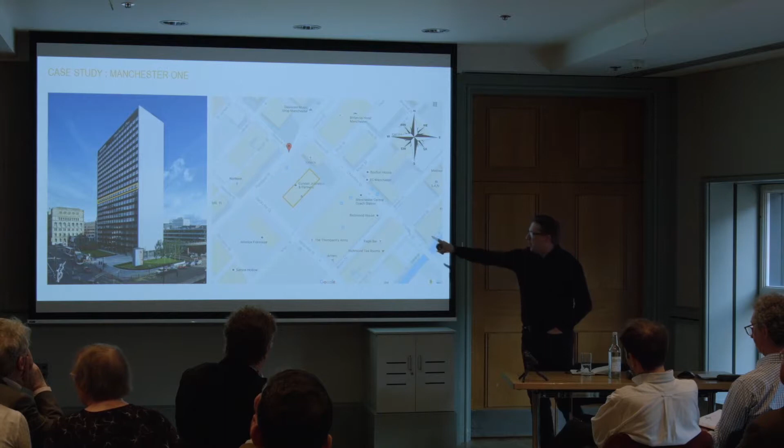Typical Manchester day on the left there. You know, I know you're all jealous, we don't like to advertise this too much. We've got no other buildings around us of that scale. Just on this side of the road here is effectively Chinatown, 3-4-storey high red brick buildings, no more than that. There is talk of the car park on the far side being turned into an office, but that might take a few years yet. Nonetheless, we have unrestricted views of the landscape around, and we have unrestricted daylight coming into this building. The building's about 15 metres deep from window to window, so we are blessed with daylight.

So you would think to yourself, if something's going to work, if you're going to get the daylight into work in a space, if you're going to be able to do equivalent melanopic lux via daylighting, this is going to be the building where you can make it happen. And that's one of the things that interested us. The building's roughly orientated northeast, southwest, so the windows are therefore southeast, northwest. We've taken an opportunity to look at both of those orientations. We only used to have half of this building, and then the tenants on the other side moved out just as we filled our half.

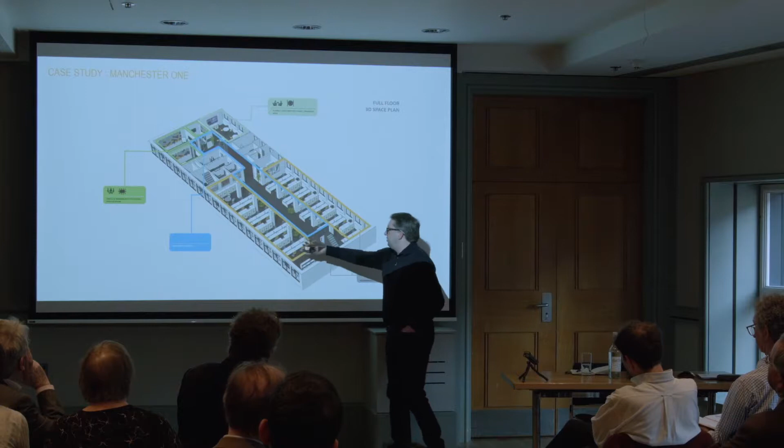So we moved our meeting rooms over effectively to the other side of the lift court, to the top left side, and that enabled us to relay out all of the desks. It's very straightforward: we put the desks as close as possible to the windows, and we put a nice wide corridor with breakout spaces down the middle. Where we don't have daylight, we've just got breakout spaces and a corridor, and display spaces. Where we do have the daylight, where we've got the windows, that's where we've got the people. It's no more complex than that, really.

So the lighting team all sit here. I bagged myself this position, which is fabulous. I might not have it for long when people find out the results of where they're sat. But it is a great office.

It's interesting what Cosmin was saying before. We can do all this number crunching, we can do all this analysis, but it just feels a great office. When you sit in there, it just feels a great office, regardless of how much light is actually arriving at your eye, regardless of how much daylight is actually arriving at your desk. Actually you're just looking at daylight - whichever way you turn, your peripheral vision is looking at daylight. So how do you put that into the standard? How do you actually get that into the standard?

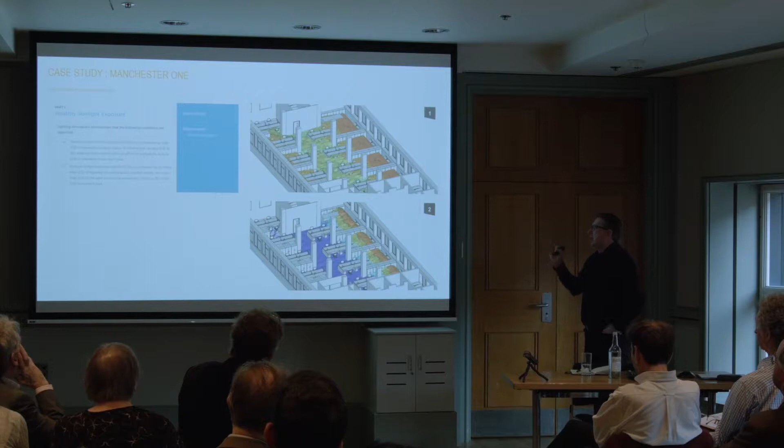So we did look at the daylight side of things, the spatial daylight autonomy, etc. Because of the way we'd laid the desks - and this is actually quite an old model now, because these desks didn't come this far in, we actually shortened each desk, and the desks finish almost in line with the columns - in terms of where the desks were laid out, we do achieve the credit for the daylighting side of WELL.

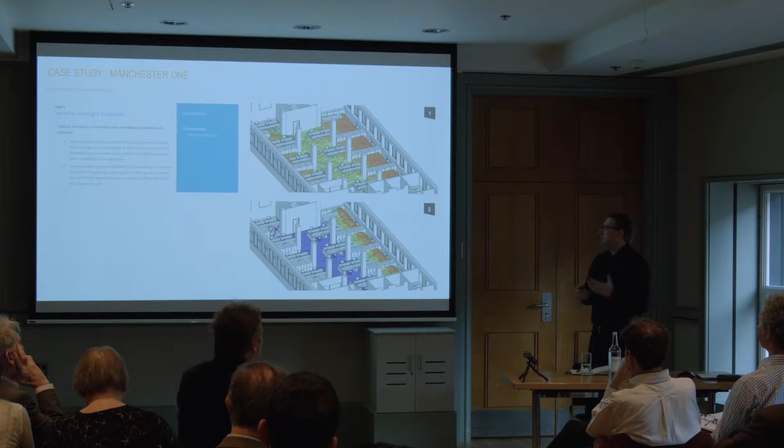But that's just horizontal lighting, looking at how much light you're getting onto your desk. Also, the second half of that, in terms of not exceeding 1,000 lux - being very practical, if you've got a blind, as far as I'm concerned you've passed that standard, because you can control whether you've got 1,000 lux or not. I don't think you need to analyse that personally. If you've got a blind and you want to limit your light to 1,000 lux or less, you can do so. So I think there are certain standards that may be a bit too numerically focused that aren't actually needed.

So moving on to the bulk of this now, looking at feature 54 and the equivalent melanopic lux and how we're going to deliver that. The big thing for us was putting the light where it's needed. We've said this for years, lots of other people have said this for years. We've said in other presentations where we've just talked about the electric lighting solution for this office - it's put the light where it's needed.

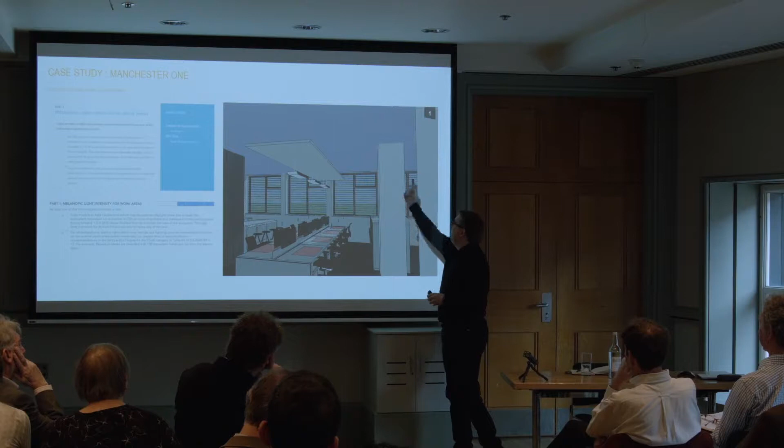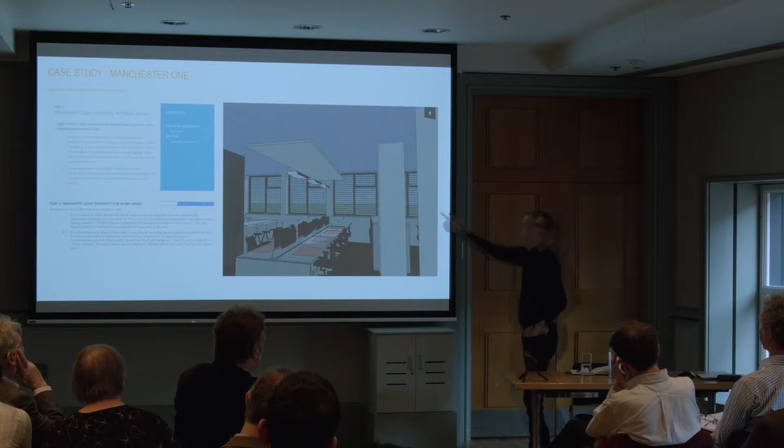So on the back of these columns here, we've actually got uplighters to light the large patch of open ceiling here. The reason for that is that the people sat here aren't looking at the uplighting here - they're actually looking at the uplighting on the ceiling in front of them. So we sat down and thought, where do people actually see? They see the end wall and they see the ceiling there, so that's where we're going to put the light. There's no actual uplighting from these fittings here because it's not often you sit and just look straight up above your desk.

We don't have slat blinds in there at the moment. That's something we're having installed so we can look at the difference between what we have now, which are roller blinds, and having slat blinds in there. And that's a very important part of what we're doing.

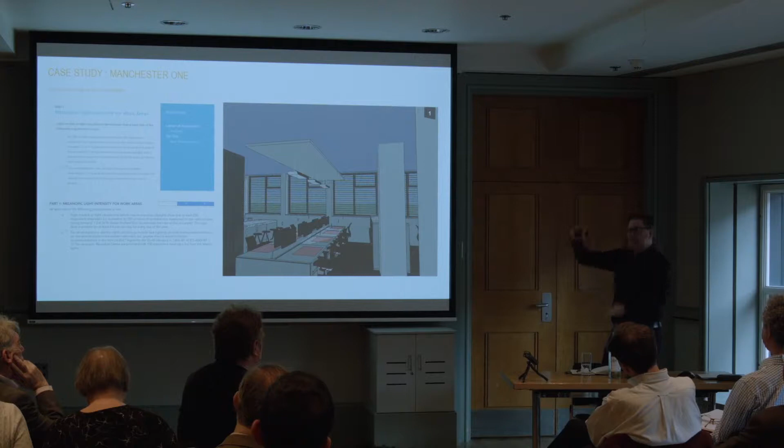The roller blinds we have in there were a requirement by the landlord. Bruntwood insisted that we had to have roller blinds because every floor had roller blinds and everyone had the same ones. So from their office two blocks away, when they sit on the 22nd floor of their building and look across at this building, we've all got the same looking blinds. They've obviously forgotten that we all like to put them at different heights to annoy them - the building doesn't look the same, the floors don't look the same. Some floors the blinds aren't down, some floors the blinds are down. But anyway, nonetheless, at the time we had to have roller blinds.

Putting the light where it's needed is something we've talked about for a long time, but it's also something we learnt from the London office. The London office lighting scheme was a Cat A fit out. The lights were only a year old, and it's not the design we would have done. It's just a checkerboard of lights, 300 by 1200 flat panel type light fittings. You've seen loads of them around London. We just don't like office spaces like that, and we certainly don't like fit outs like that. It's just not a good solution. Yes, it gets you 400 lux everywhere in an empty office on the working plane, but that's it.

Once you start moving furniture in, once you put screens in there and put people in there, you don't have that 400 lux everywhere, and nor do you need it really. So we had what we had, and we toyed with the idea of taking them out, but within the lease you're going to have to put them back in 10 years' time when you leave the building, and where do you store them for the next 9.5 years, and the cost of that. So they stayed in. It's not ideal.

But it did give us an opportunity to look at what happens vertically at each person's desk with this lighting scheme. This scheme apparently gets us 400 lux everywhere, because that's what we've been told it achieves. But when you start measuring vertically at different people's desks, only a couple of meters apart from each other, we're starting to see differences of 127 to 651 lux. It's huge. Now that is actually the worst place in the office. There's nowhere else that has that variation of vertical illuminance.

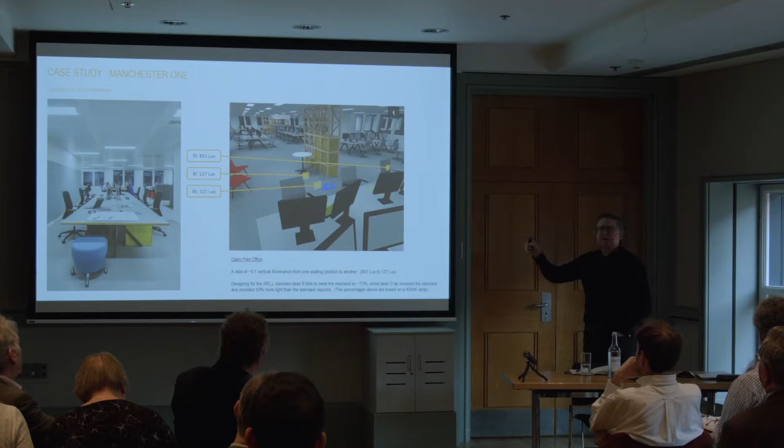So it was a good experiment to have had that, and we are in the process now of changing the lighting for the marketing team who sit here, because it is the worst place. They're the furthest from any daylighting, and the lighting just isn't working for them, so we're in the process of changing that now.

Hence we went down the route of putting the lighting over the actual desk, so you put the light where it's needed. We've got the lights over the centre of the desks, a little bit of corridor lighting, some lights that wash onto the back walls, and uplight on the other side of this column for uplighting the soffit.

And the results we get from that, if you look here, we've got desks 1 to 4 down one side, I sit at desk number 1, and desks 5 to 8 on this side. We've set the horizontal illuminance lighting levels to be about 350 on the desks, and that's roughly what we're getting on each of those. Vertically, we're then getting between 230s, 240s, 250s. Now that's the lux level we're getting, not equivalent melanopic lux level, so that's just the lux level from there.

So you could say to yourself, well, if we want to hit this figure within the Well standard, this 250 equivalent melanopic lux, if we just choose a particular light source, a light fitting that's 6,500 Kelvin, we can convert these vertical figures directly to equivalent melanopic lux, and we've ticked that box. Happy days, that's what we've done. Actually, we didn't want to go down that route.

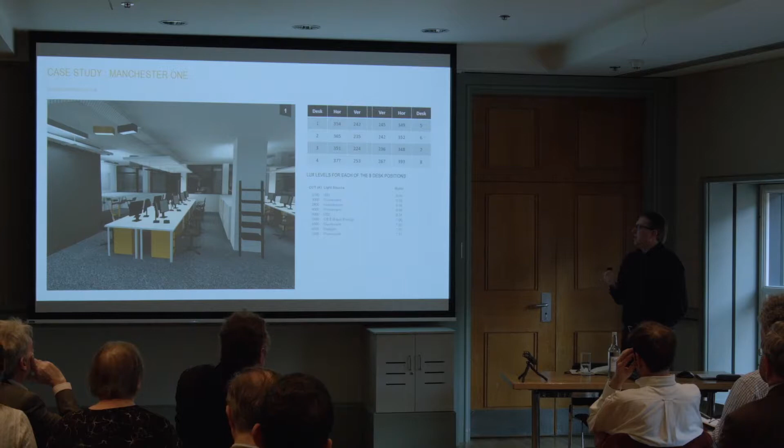Our strategy when we started designing the building and looking at the lighting was that it should always be daylight that lights a space, supplemented by electric lighting. The electric lighting shouldn't be the prime source within a space. We're looking forward to designing a building where the lights are off 90% of the time, though I'm not sure anyone can afford to design that kind of building and buy the land.

If you go to the National Gallery, some rooms have no lights on at all. It's great just walking through. And the quality of light, even though it's at a lower level, is fabulous - that's something else we've looked at with this.

So we said to ourselves, we want daylight to be the primary source of light. Even if that daylight isn't achieving the lux level the guides tell us we should achieve, is a lower level of daylight better than suddenly turning the electric lighting on? From the analysis of how much daylight we've got coming into these spaces and onto all the desk positions, we decided the electric lighting would only be 3,000 Kelvin.

So we've actually only got 3,000 Kelvin electric lighting over the desks, which is quite unusual - you do have to see it to appreciate it. What that means, using these figures as an example, is that in terms of chasing the equivalent melanopic lux target for the Well standard, we're actually only delivering theoretically 120 to 140 equivalent melanopic lux, because we've gone down the route of using 3,000 Kelvin lights over the desk. So we're not achieving the equivalent melanopic lux with the electric lighting.

But what we felt we were achieving was warm colour temperature light briefly in the morning, then daylight taking over through the bulk of the day, and warm colour temperature lighting again in the evening. That was the theory, and that's the route we've gone down.

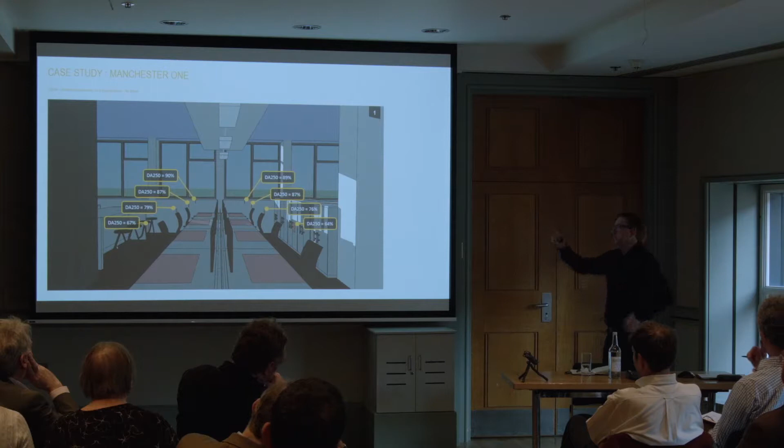And these are the results that came out. So I'm alright - I've got 90% of my time if I'm there, great lighting at my desk, assuming we haven't pulled the blind down. This is without any blinds, so it's the maximum amount of light we can get into the space. But it surprised us, because we were still getting 64% at the desks furthest from the window, which I thought was pretty good - that's two-thirds of the light they need coming from daylighting for those hours 9 till 5.

How many metres from the window is that? The desks are - I can't remember if we went with 1,500 or 1,600mm wide desks in Manchester. I think there were 1,500 in London and 1,600mm wide desks here, so you're looking at about 6.4 metres to the edge of the desk.

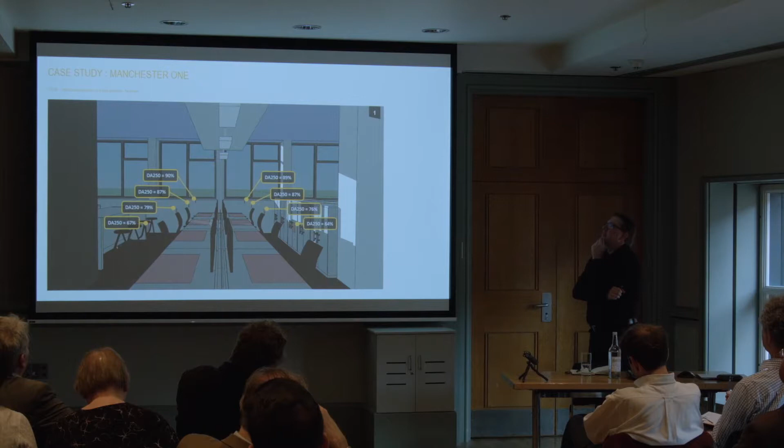This is also with the false ceiling taken out - we screwed all the services to the ceiling, and the windows go up to the soffit as well. Previously we used to have that nasty bulkhead detail and you lost the daylight at the top of the window, whereas now we've gained the daylight coming from the top of the window. The height of the space is about 2,950mm.

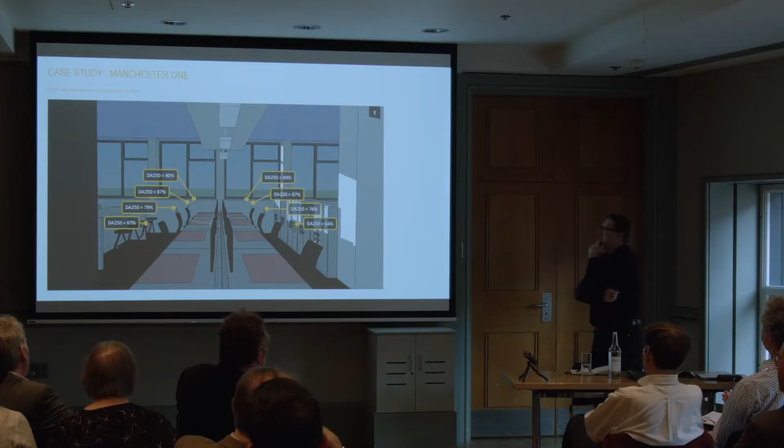So it's a high space with no obstructions - well, until the staff moved in, and then you start getting books and light fittings and all sorts of things all over the desk. So this is where we got to, and we thought, well, this is actually, as we expected it to be, a very good space.

Yes, we've got to deal with some glare control occasionally. But with it being our own office, and particularly with our team here, we are forever turning the blinds up and down because we know the value of it. As you go further down the office to the other disciplines, civil, structural, etc., the blinds tend to come down and stay down. We occasionally go over and say, look, lift your blind, this is killing you. And they do lift the blinds, but we do change the blinds a lot.

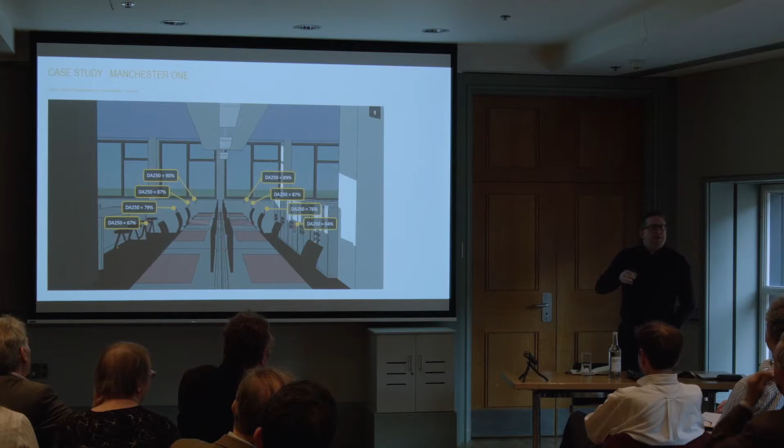So we're not far off achieving these figures. We're only expecting to top these figures up with the electric lighting. But of course, this is lux levels from climate-based daylight modelling. This is not equivalent melanopic lux.

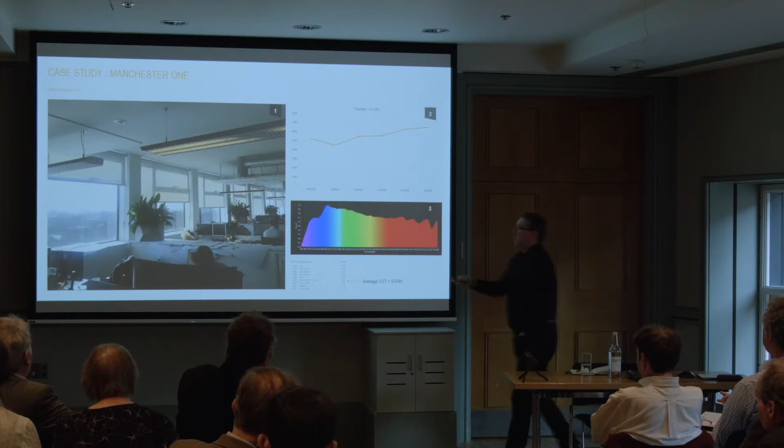So we started taking measurements and looking at what the actual spectrum of light coming through the window was at different hours of each day. Very crudely, and I appreciate this is incredibly crude, the average of all this was 5,704 Kelvin of daylight coming into the space. When you put an arrow against these figures, you can say that's about a ratio of 1. So if we're getting 250 lux from climate-based daylight modelling, extremely crudely, you could argue you're getting 250 equivalent melanopic lux there. I mean, a downside is we have an incredibly heavy tint on the window.

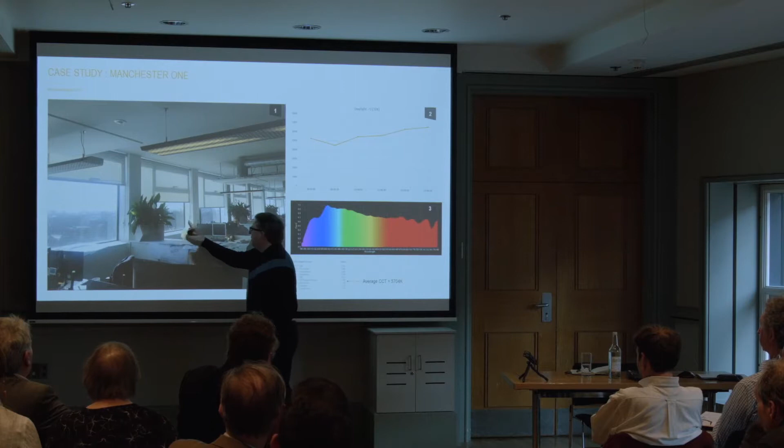Again, something the landlord insisted on. There isn't an incredibly heavy tint now, and they didn't change them all. They managed to miss this one, which you can actually just see as the colour shifts. Yeah, they changed them all except one - I think maybe to remind us how bad it used to be when it was tobacco coloured.

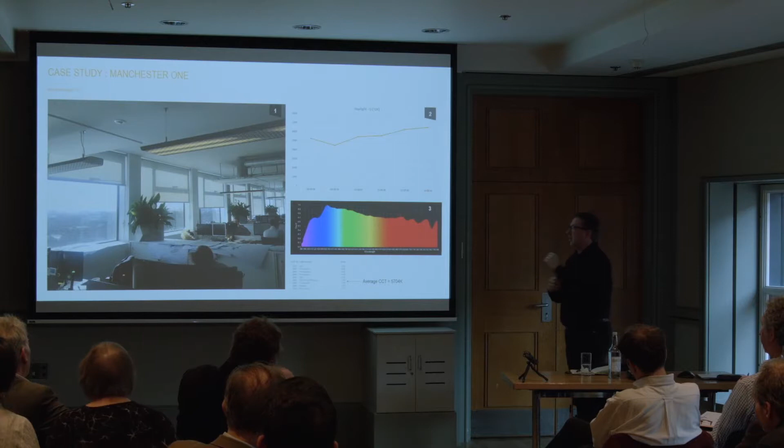And it's noticeable when you open the window just how heavy that tint is. You don't realise at first, but if you crack open the window and see the blue sky, which we always get, you will then see the difference between the blue sky and the actual film.

And we got to this point where we thought, well, is that good enough? Are we happy with that? Okay, we're quite happy with that. It's not science, you know, but we're quite happy with that. But is there anything else we can do about it?

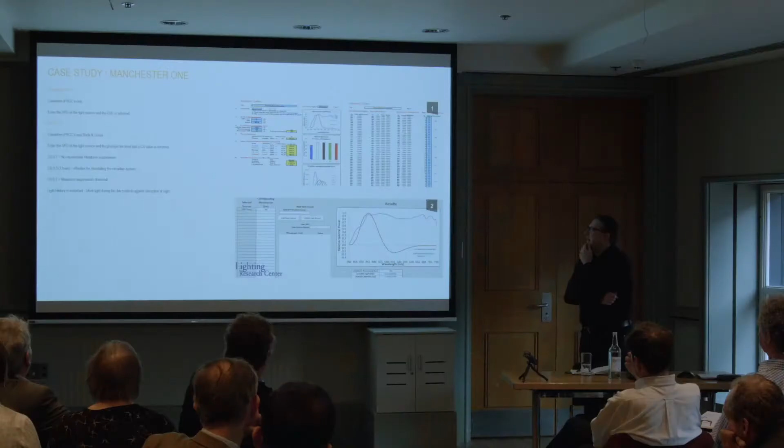And of course, we've got the toolkits online. You've got the Lucas toolkit, and you've got also the CS toolkit, the circadian stimulus toolkit. We thought to ourselves, well, can we start to look at our actual measured lighting in our space in relation to the Lucas toolkit and the circadian stimulus toolkit? The circadian stimulus one is interesting. I think you're the same mind, Cosmin, that there seems to be much more research gone into the background of the circadian stimulus - they seem to have looked at more aspects of lighting and how it impacts on us to arrive at these figures.

So 0.1, if you achieve a CS of 0.1, it effectively means there's no melatonin suppression - the lighting you're receiving isn't suppressing melatonin. Once you have 0.3 for an hour, that's effectively saying you've achieved the melatonin suppression you need at the start of the day. And if you hit 0.7, you've effectively saturated your eye - they've not experienced anyone achieving more than 0.7.

So we were interested to look at the space we were in now, taking certain days - a clear day, an overcast day, a low angle sun in January or February, or then taking June, July, etc., a high angle sun. We were interested in looking at all this data.

Foolishly, we said to ourselves, yeah, we'll measure the data on 4 windows, 16 desks, horizontally, vertically - that's what we need to do. And then after a few days, with all this data, you think, what am I going to do with that? So maybe fewer desks might have been the way to go originally, because there's just so much data now, and actually trying to sift through it is the bigger issue.

So we've had a look at these two, and basically what you can do with both is put in the spectral power distribution of the light you're measuring along with the lux level. In the case of Lucas, it actually gives you 5 different figures, including the equivalent melanopic lux. In the case of CS, it will give you the circadian light, or the CS ratio, 0.3, 0.4, etc.

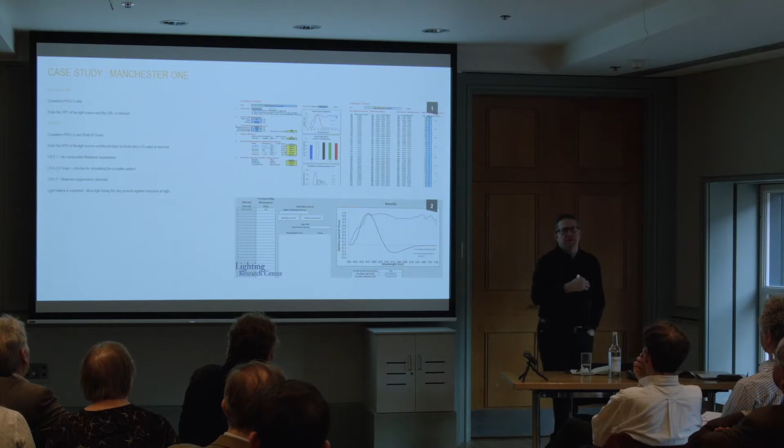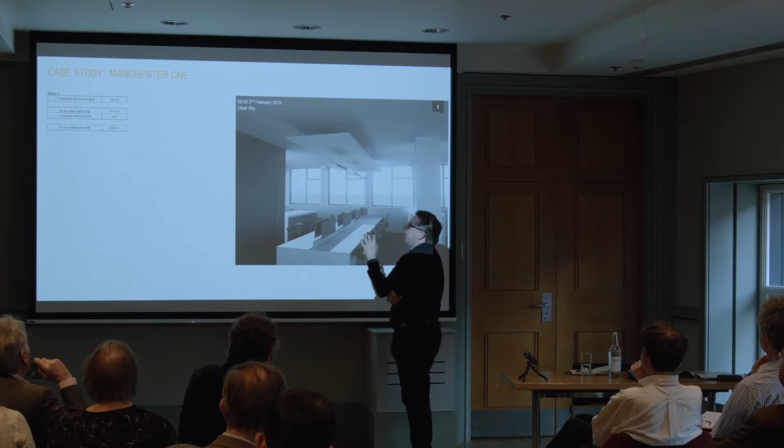So we started taking measurements at the desks in the office. This is my desk here. On this particular day, 2nd of Feb last year, 9 o'clock in the morning, there was 484 lux vertically, photopic lux, where I was sat. 621 circadian lux, with a CS of 0.4 or 0.45, which was an equivalent melanopic lux of 500.

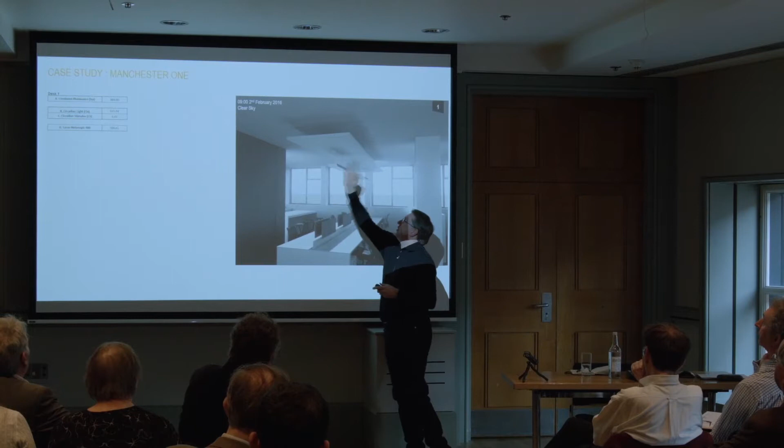So this is light that's actually coming in, with all the electric lighting, or almost all of it, turned off. Certainly the up lighting onto the coffers was turned off. I hadn't turned off the light fitting in the corridor, foolishly, and you'll see that in a minute because it does have an impact on the results. So this is effectively what we're receiving daylighting-wise in that space - we're getting 500 equivalent melanopic lux and 0.45 circadian stimulus.

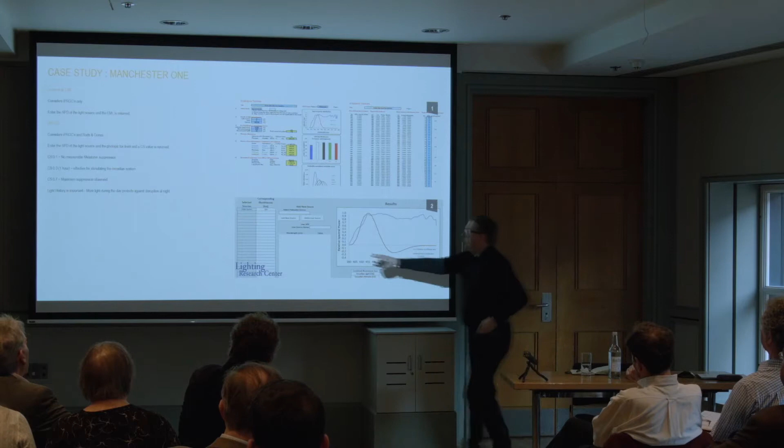How do you calculate the circadian light or circadian stimulus? What do you use to measure it? You put the data - there's a table of numbers, the wavelength and your value - into here, and the spreadsheet does it.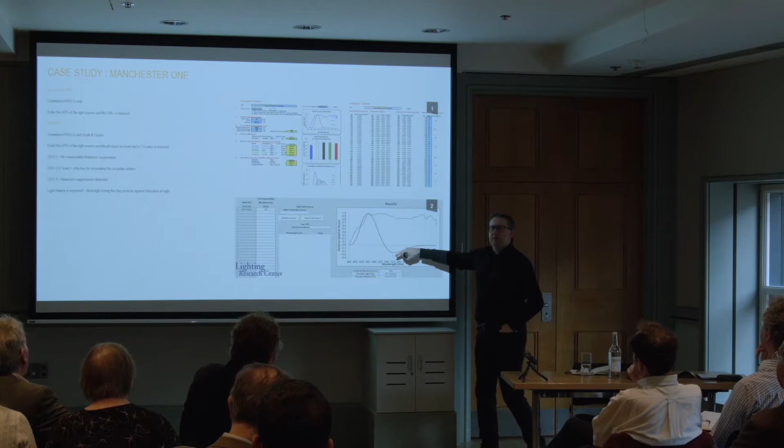And what program is that? So these are two toolkits you can find online - I can give you the details afterwards.

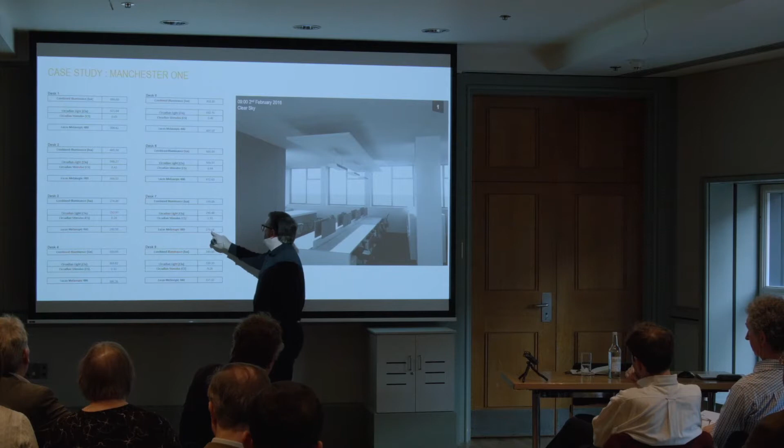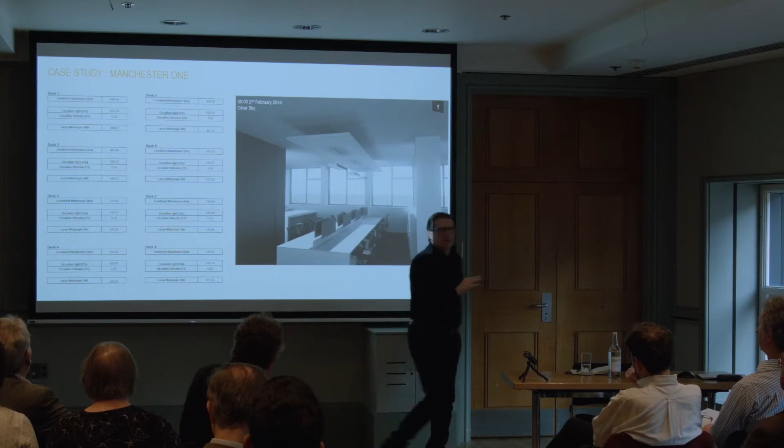So we then looked at all of the other desks as well, for that same particular time, 9 o'clock in the morning, 2nd of February. We can see the first 4 desks had circadian stimulus above 0.3, but we start to find we're on the edge of 0.3 by the time we get to the 3rd desk from the window. Interestingly, we're just above 250 equivalent melanopic lux and just above 0.3, then just below 250 and just below 0.3. Again, it's not an exact science - it's the particular wavelength coming in the window at that time - but it is hinting towards 0.3 being quite close to 250 at that time, which was quite interesting.

This went back up, which is always one of those 'why is that' moments, and then we realised we'd left the corridor light on, which was a 3-watt LED, adding a little bit more light to the end desk. So that's why that happened. We need to have a look at these again, but it's quite interesting what we were seeing.

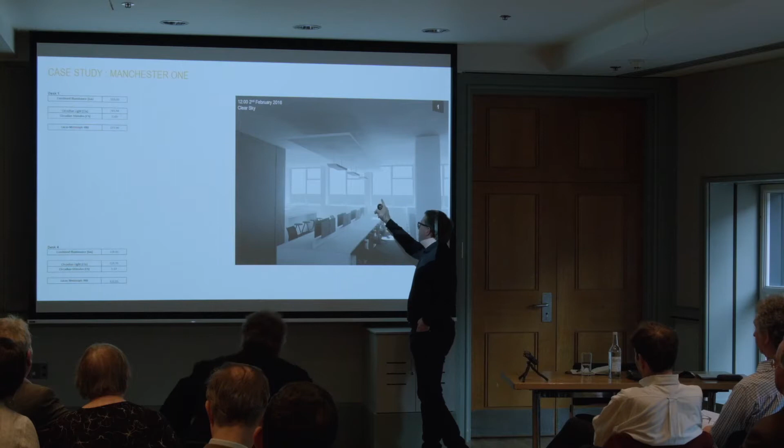So we then thought we'd have a look at what's happening at midday. We did this every hour on the hour, got it down to quite a fine art, myself and Liz - about a 3-minute round trip to take all these measurements. Not ideal, because you'd rather just take the measurements, but we haven't got that many meters. So we were measuring the lighting on the window, doing 4 desks, measuring the window again, doing 4 desks, measuring the window lighting again, just so we could go back and see if the sunlight level had shifted during the time we were taking measurements.

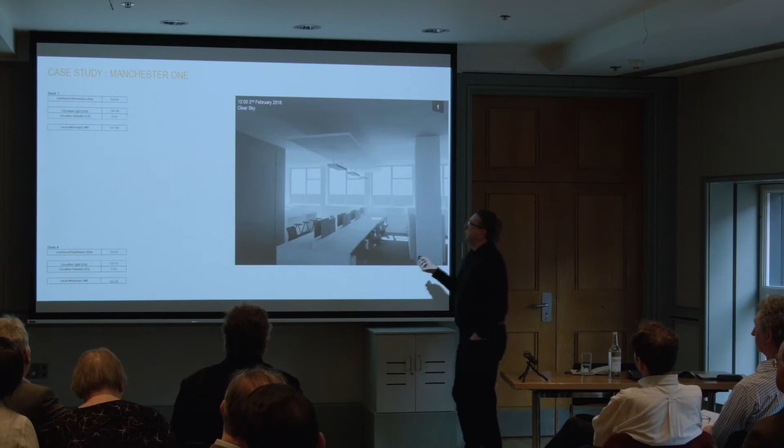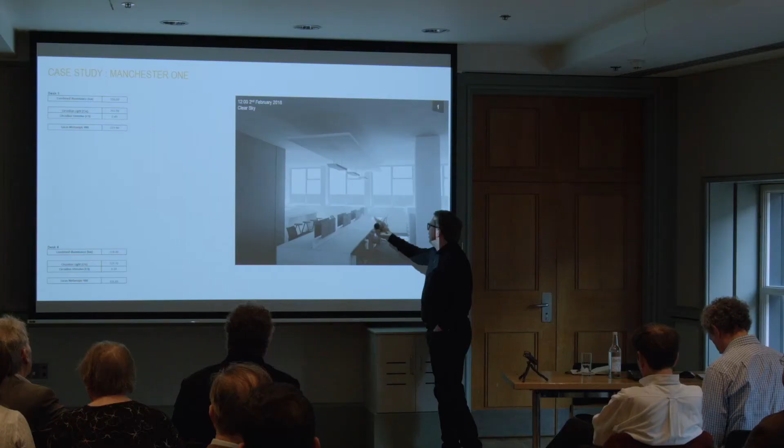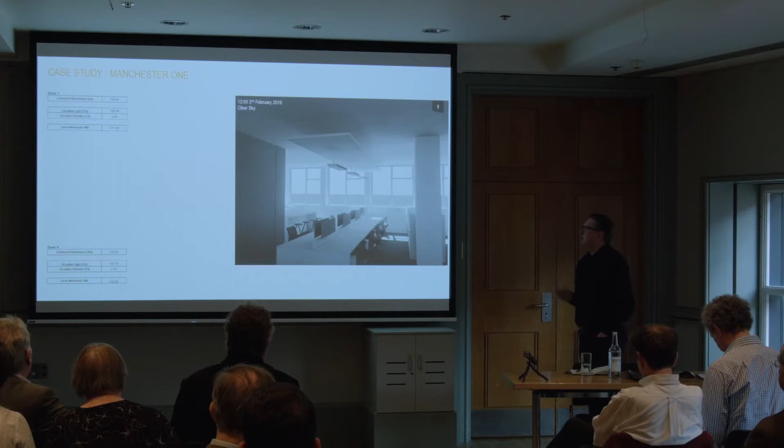What you see here is, where I sit, the circadian stimulus has gone up from 0.45 to 0.49, so I'm getting more light - but then again, the sun's higher in the sky, it's later in the day. But it's massively decreased at the desk furthest from the window, going down from 0.3 to 0.14. So the person furthest away now isn't getting the light. Essentially, we only have roller blinds, so the light's either coming in or it's stopped - we're not doing a lot else with the light, we're not reflecting it. We've got white desks, chosen for that reason, to reflect light around the space. But by the time people have laid out their work, you're not getting that same level of reflectance you thought you'd get from a desk. So it's a bit of an eye-opener at how quickly the light decreased as you moved away.

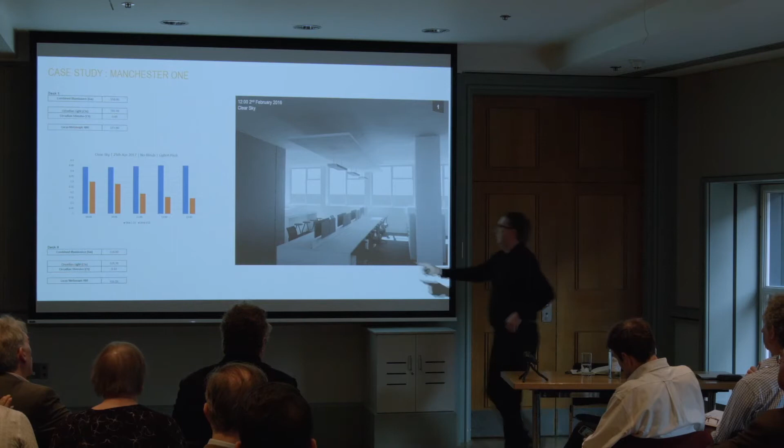This is looking the other way, and I've used the actual photograph rather than the pretty render—more real about how the space looks and is used. This is looking towards the electrical team, effectively the same position but looking the other way. This is 12 o'clock again, 2nd of February—I was up at 0.49, our lowest person was 0.14 circadian stimulus. Joe, who sits here, is up at 0.41, and we're down at 0.18. So there's actually more light at this side, even though the sunlight's on the other side of the office. I think it just indicates how quickly this can vary, and how different the desk can be—our desk didn't look like that when we took the measurements, that's just the render. It shows how quickly the lighting can change, moving from 0.14 to 0.18, etc. Certainly very interesting.

But then we thought, okay, we're learning a lot. We've got a lot more data to go through. We're learning a lot about the daylight coming in, what's actually arriving at our eye. It's quite pleasing to see that we're above this 0.3 circadian stimulus figure, so that's all positive.

So we'll take some electric light meter readings now and show that we're getting this calm environment in the evening, that this 3000 Kelvin is actually doing the job it's meant to do, because we all feel good. At 4 o'clock in the winter, the space feels great—it's relaxed, soft, gentle, warm. People go home at 5 and 5:30, and they are more relaxed than they would be sitting under 4,000 or 6,500 Kelvin LEDs.

So we thought we'll take some measurements, and lo and behold, we're at 0.32 circadian stimulus. We're scratching our heads thinking, right, okay. So we measure it again, and again, thinking surely something's gone wrong. You tap something, and it doesn't change—we're still at 0.32 circadian stimulus.

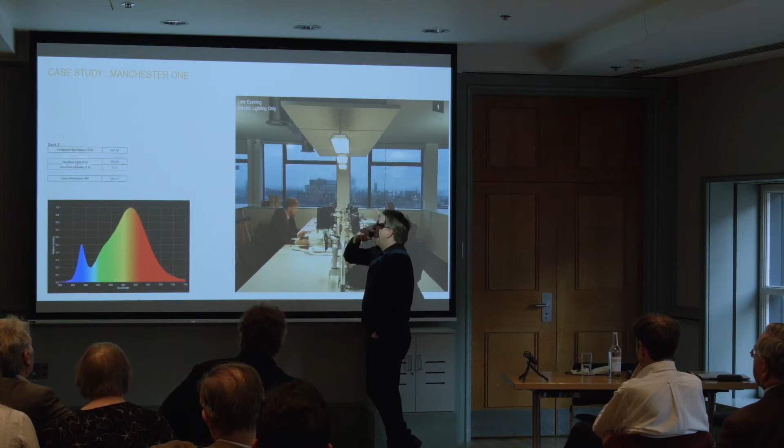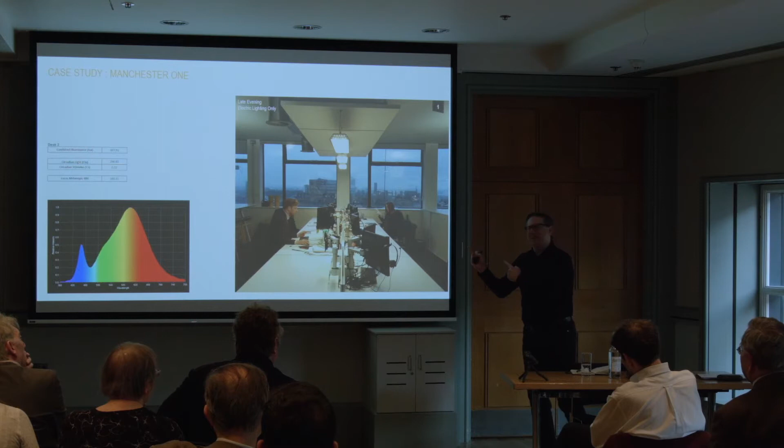When you look at the fact that they're taking into account not just 480 nanometers, which equivalent melanopic lux accounts for, but the wider spectrum, we're still up at 0.32. So there's us thinking we've got this lovely, warm, relaxed environment, that we're no longer suppressing our melatonin, sending our staff home relaxed—and we're not. Interestingly, the equivalent melanopic lux, the Lucas method, is down at 160, roughly where we thought we'd be. So Lucas is saying this is relaxing, while circadian stimulus is saying go for it, you can do another 8 hours. So there's something that needs looking into there—it's not just the wavelength, not just the color temperature, there's more to it than that. That's been interesting to learn about as well.

So coming on to the conclusions then.

For me, it'd be great if we could find a way through climate-based daylight modelling or similar methodology where we're looking at annual data that we can show clients: this is where to sit your staff within a space, this is where they'll receive the best level of light for circadian stimulus. But what's missing is that unless you take a leap of faith that the lux level from climate-based daylight modelling is 6,500 Kelvin, we haven't got that methodology at the moment.

John, I'm hoping you're going to say you're working on just the thing we need, but clearly not. Is there a way to link the spectral data to the climate-based modelling data? Actually, we did do that in the study published in 2012, the one with Velux. We tracked the spectrum through that. It was a rough attempt, but in principle it's possible.

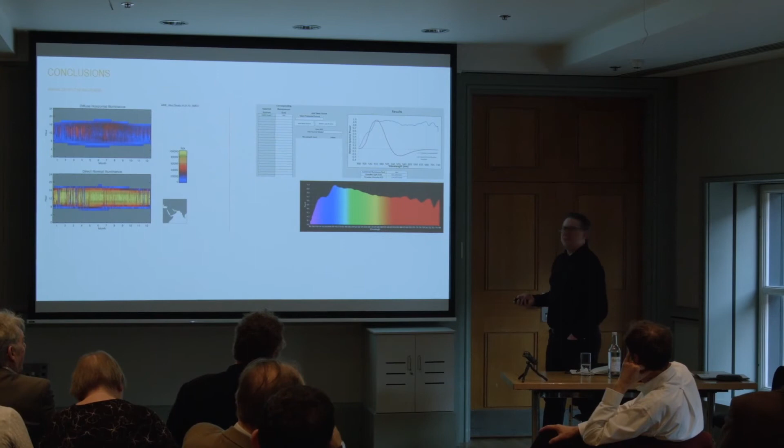One of these, I can't remember whether it's the Lucas et al. or the Rea model, is based on a 32-year-old. And if you compare a 75-year-old, a 75-year-old needs 3.9 times as much light as a 32-year-old for equivalent circadian performance. We do know that, so I think there is very much a case.

CAD operators should always be in the middle because they always close the blind anyway, so they're another group of people we can consider. Other sedentary people, like older people, sitting behind sheets of glass for 99% of their day—some of this filters through into their well-being and health status. Simply putting them behind a sheet of glass is deleterious to their health.

So giving them enough light to stimulate their circadian system is absolutely essential. We should be thinking about this in a much more global term.

I agree, and I think the WELL standard is a pain because it only says 'office' on the front. My students at the moment are transferring this into different areas, and you might write, well, it says offices on the front of this. We did the same with climate-based daylight modelling—it went into the school design guide, but we just used it for offices anyway, and it gives a different style of building when you use it that way. So the office guide hasn't caught up yet, but it will eventually, and happy days when it does.

With that much glazing, you're obviously very lucky—I've been to your office and it's fantastic, but you have loads of glazing. Is that affecting the temperature of the building in the summer? Does it get too hot?

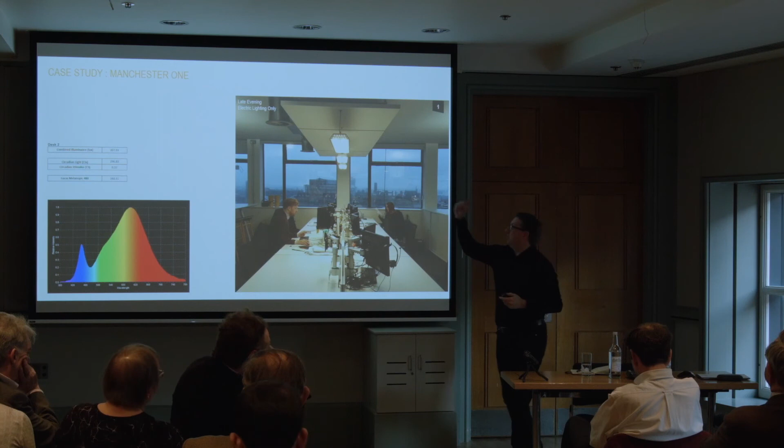So if they'd been left the way we'd said, similar to our office, we've put them here such that we can get the light to come in and bounce up. So again, a lesson learnt there. I did have those slides, I can find them and send them on.

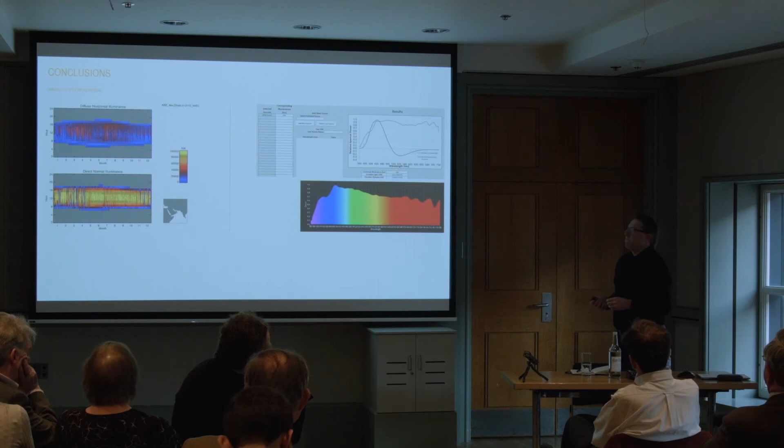I shall move on to some more things. Very worried about human-centric lighting, sort of doing away with windows, particularly in London.

I think we're going to have to watch out for that one. But then this is the other one, and we've just touched on it now. Historically, we've had this 4,000 Kelvin lighting in offices at 500 lux or 300 lux, depending which guide you're going on. And that's typically what's always been the case.

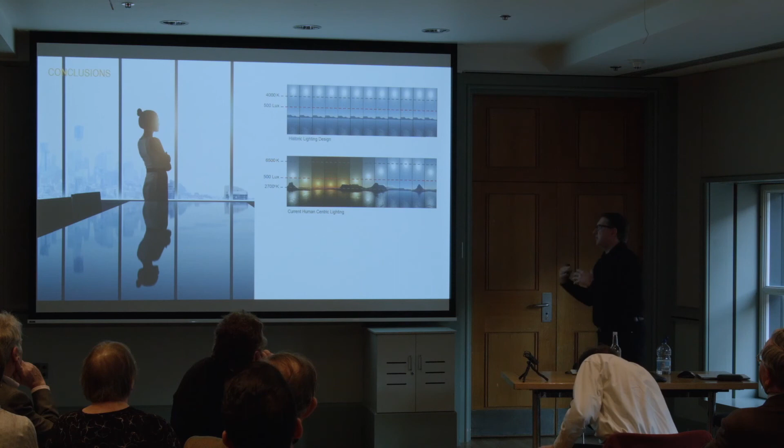And we've got this current human-centric lighting thing going on where people are actually shifting the colour temperature, looking at 2.7 to 6.5, and they shift it during the day. But what we've already seen with our office, we had the 3,000 Kelvin light, and it is very warm, but we've actually still got a circadian stimulus of 0.32 during that time.

So are we needing to get to this point where actually in the evening the lighting, as well as the colour temperature dropping, the lighting level drops as well. So for the last hour of the day in the winter, we maybe only have 150 lux of light. So we are bringing that circadian stimulus down.

That's up for debate. I mean, we're going to try it. Luckily, we can try it on our own guys and ask them not to sue us. But we'll try it and see what impact it has. We've done this a number of times with our staff before - we ask them questions, we don't tell them we're just doing the lighting. We try and tell them we're doing 3 or 4 different things, so they're not focusing on the lighting. But this is something that perhaps we need to look into.

And then finally, it's kind of like, does it actually matter? Does any of this really matter? And I argue both ways with myself. I argue yes it does, and I argue no it doesn't.

I see that, you know, either side of lunch, you're in the office and you're not in control of the lighting that someone has given you. We're quite lucky, we've got some degree of control over the lighting in our office, but most people have no control. Most people don't know that they should have control. Most people don't know whether what they're sat under is good or bad lighting. So you've got 7, 8, 9 hours there where people are in a space they're not in control of, that might not be right for them.

So yes, all of this does matter. But then if you're talking about achieving a circadian stimulus of 0.3 for an hour in order to suppress your melatonin, then if you just sort out where you have your breakfast and make sure you have it by a window, and if you actually walk to work instead of getting the tube, have you actually achieved that? I was in Adelaide for a project a while ago, and I just thought I'd try a day in the life of.

So I took my little meter with me and started measuring how much light I was receiving. Getting up in the morning, I just sat there for half an hour doing a few emails in front of the window, measuring the lighting level I had. And then I took my walk to the office, so I went down the street and measured again the lighting level, the colour temperature, and the spectral distribution. And actually by this point, after an hour in the morning, before I even got to the office, I'd achieved my CS of 0.3 for an hour.

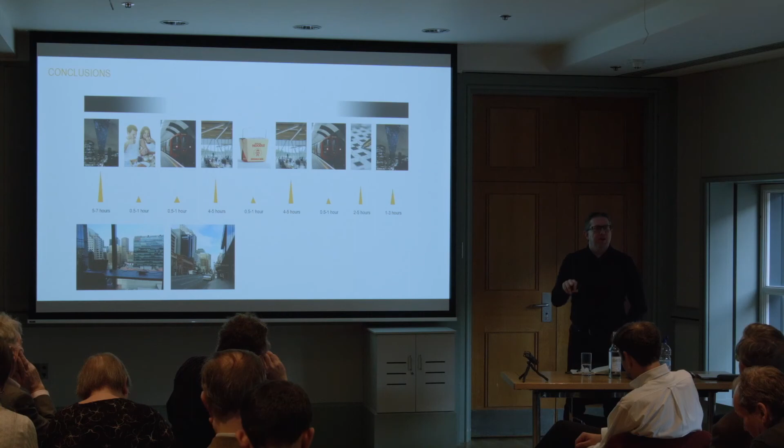So I've done that job. So apparently I've done everything I need to do. I've not even got to the office yet.

Now the way we've done our office is to just give everyone a table lamp, because it's such a small, cosy little office. We've got no ceiling lights. People just have a table lamp, and then we've got some daylight coming from one side. Although there's actually some massive trees out here as well, which actually shade the light coming in. So we've lit the wall with a table lamp, but you do get some more light from that when you need it, and you can turn it off when you don't need it.

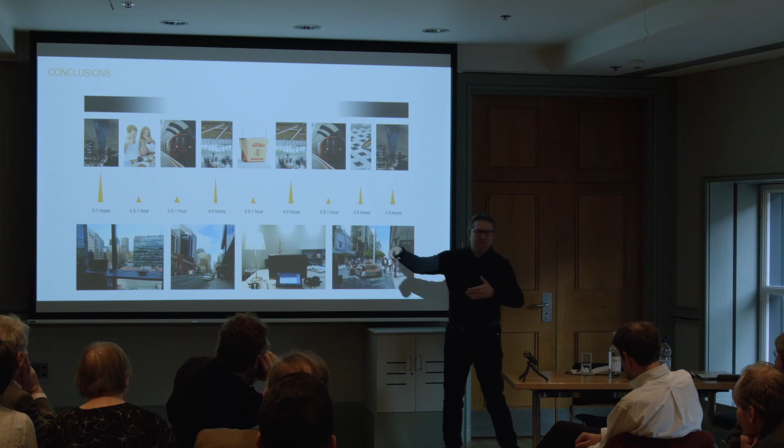And of course you go out by lunchtime - by lunchtime you've saturated, you've hit all these figures you're meant to hit. So I'm arguing with myself, does it matter what we do in an office? Yes. Does it matter what we do in an office? Perhaps no. So anyway, thank you.